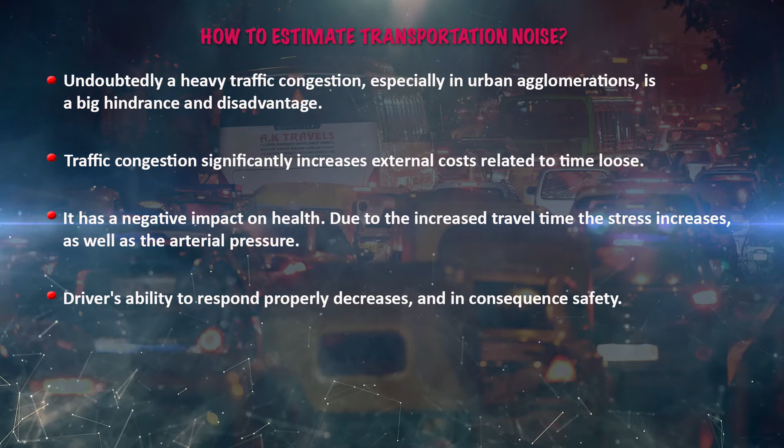Due to the increased travel time, stress increases and arterial pressure increases. The driver's ability to respond properly definitely decreases, and in consequence safety is affected. These are the factors involved in the transportation sector. Although these effects of congestion resulting from excessive traffic, poor traffic management and sometimes drivers' errors are difficult to measure, many efforts are made to improve traffic flow, especially in urban areas.

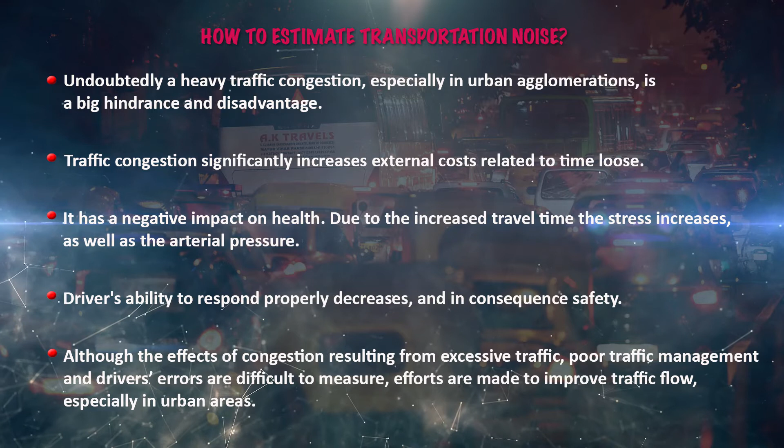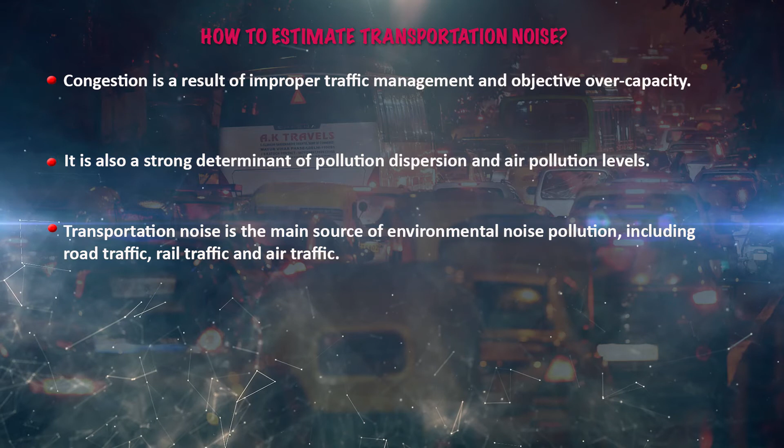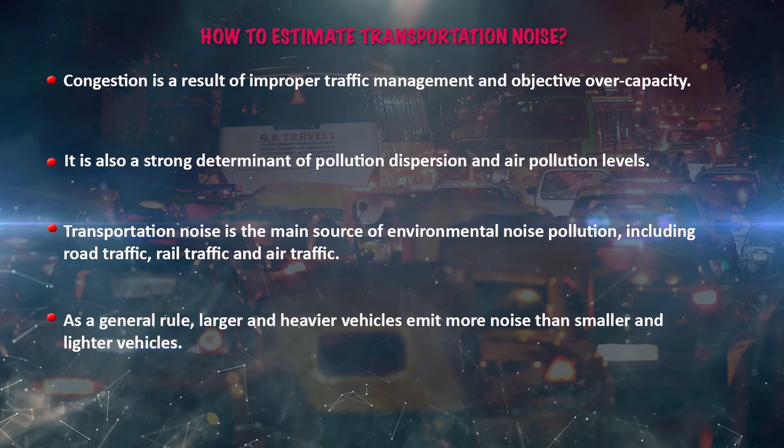Congestion is a result of improper traffic management and objective overcapacity. It is also a strong determinant of pollution dispersion and air pollution levels. Transportation noise is the main source of environmental noise pollution, like road traffic, railway traffic and air traffic. As a general rule, larger and heavier vehicles emit more noise than smaller and lighter vehicles, with some exceptions, like helicopters and 2 and 3 wheelers.

The noise of road vehicles is mainly generated from the engine and from frictional contact between the vehicle and the ground and air. In general, road contact noise exceeds engine noise at speeds higher than 60 km per hour. The physical principle responsible for generating noise from tire road contact is less well understood, that means it is not properly studied.

The sound pressure level from traffic can be predicted from the traffic flow rate, the speed of the vehicles, the proportion of heavy vehicles and the nature of the road surface. Special problems will arise in areas where traffic movements involve a change in engine speed and power, like traffic lights, hills, and intersecting roads, and sometimes where topography, meteorological conditions and low background levels are unfavorable, like mountain areas.

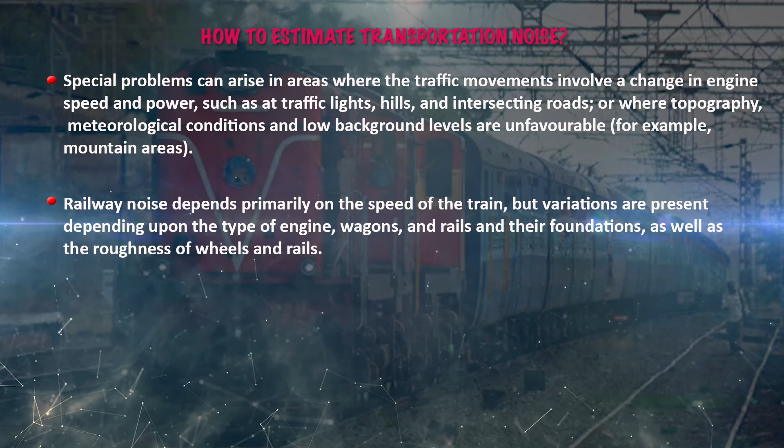Railway noise depends primarily on the speed of the train, but varies depending upon the type of engine, type of wagons, rails and their foundations, and the roughness of wheels and rails. Interestingly, small radius curves in the track, as may occur for urban trains, can lead to very high levels of high frequency sound, known as wheel squeal. Noise can be generated in stations because of running engines, whistles and loudspeakers, and in marshalling yards because of shunting operations.

The introduction of high speed trains has created special noise problems with sudden but not impulsive rises in noise. At speeds greater than 250 kilometers per hour, the proportion of high frequency sound energy increases, and the sound can be perceived as similar to that of overflying jet aircraft. Special problems can arise in areas close to tunnels, in valleys, or where ground conditions help generate vibrations. Long distance propagation of noise from high speed trains may constitute a problem in the future as environmentally friendly railway systems are expanded.

Aircraft operations generate substantial noise in the vicinity of both commercial and military airports. Aircraft takeoffs are known to produce intense noise and vibration, as well as rattle sound sometimes. Landing procedures also produce substantial noise in long, low altitude flight corridors.

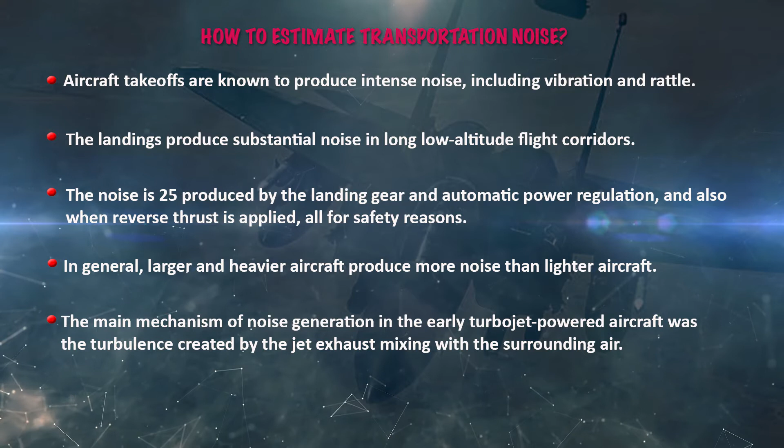So the main mechanism of noise generation in the early turbojet powered aircraft was the turbulence created by the jet exhaust mixing with the surrounding air. This noise source has been significantly reduced in modern high bypass ratio turbofan engines that surround the high velocity jet exhaust with lower velocity airflow generated by the fan.

So the fan itself can be a significant noise source, particularly during landing and taxiing operations. Multi-bladed turboprop engines can produce relatively high levels of tonal noise. The sound pressure level from aircraft is typically predicted from the number of aircraft, the type of airplanes, their flight paths, the proportions of takeoffs and landings, and the atmospheric conditions.

Severe noise problems may also sometimes arise at airports hosting many helicopters or smaller aircraft used for private business, flying, training, and sometimes leisure purposes. Special noise problems may also arise inside airplanes because of the vibration. The noise emission from future supersonic jets is of course unknown.

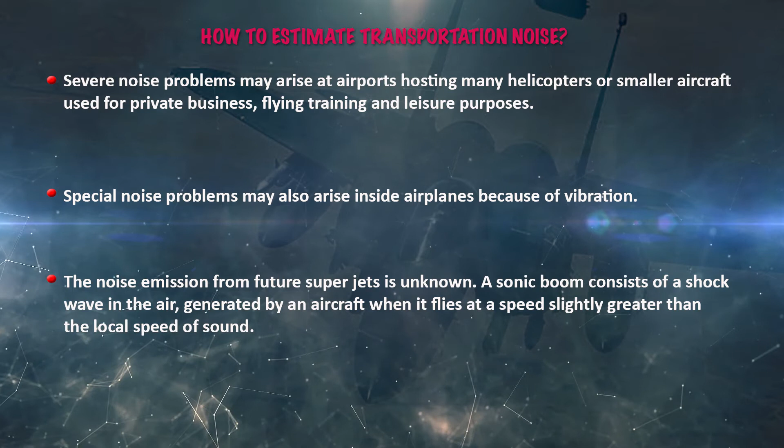A sonic boom consists of a shock wave in the air generated by an aircraft when it flies at a speed slightly greater than the local speed of sound. An aircraft in supersonic flight trails a sonic boom that can be heard up to 50 kilometers on either side of the ground track, depending upon the flight altitude and the size of the aircraft. A sonic boom can be heard as a loud double boom sound. At high intensity it can damage property.

Noise from military airfields may present particular problems compared to civil airports, for example when used for nighttime flying, for training interrupted landings and takeoffs, that means touch and go, or for low altitude flying. In certain instances, like wars or specific military activities, there will be other intense noise pollution from heavy vehicles like tankers, helicopters, and small and large firearms.

So there are 5 types of transportation noise estimation. The first one is internal combustion engine noise prediction. When the internal combustion engine is working, it generates a lot of noise in the surrounding environment. Noise can disturb people's daily life and even endanger people's health. The noise problem has become a growing concern of society. When people are exposed to noise for a long time, it can cause insomnia, cardiovascular diseases, and sometimes death.

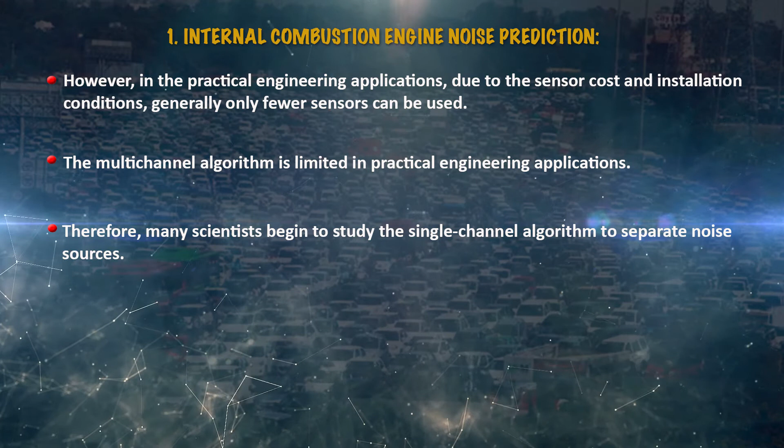The Global Legislative Committee is developing strict regulations to make ships, cars, and other transportation vehicles quieter. However, in practical engineering applications, due to sensor cost and installation conditions, generally only fewer sensors can be used. So the multi-channel algorithm is limited in practical engineering applications. Many scientists began to study the single channel algorithm to separate noise sources. For example, Du et al. used empirical mode decomposition, EMD, and independent component analysis methods to separate the combustion excitation signal and the piston slap signal.

Another mode is the ensemble empirical mode decomposition, EEMD, which is a noise assisted data analysis method that adaptively decomposes signals based on the local characteristics of signals. All complex signals are composed of multiple simple intrinsic mode functions, IMF, and each IMF is independent. EEMD makes noise cancel each other by continuously superimposing white Gaussian noises on the input signal.

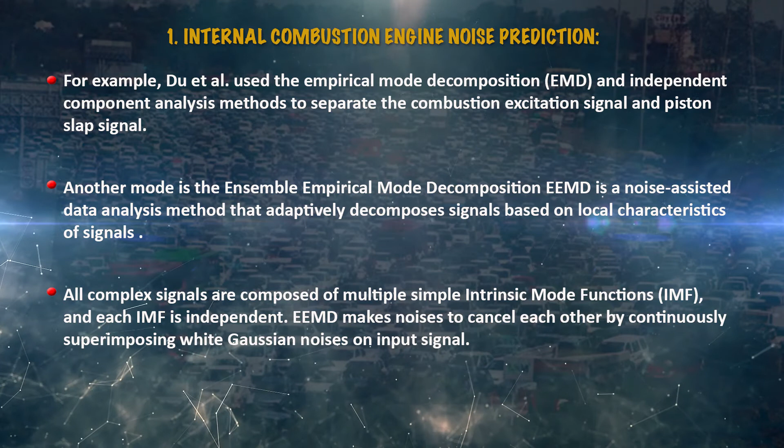In this way, this method can decompose different scales or trend components that really exist in data time series step by step and generate data sequences with the same characteristic scale size, and the additional noise is gradually eliminated one by one. The final result of denoising is the signal itself, because it is the only durable and stable part of the EEMD.

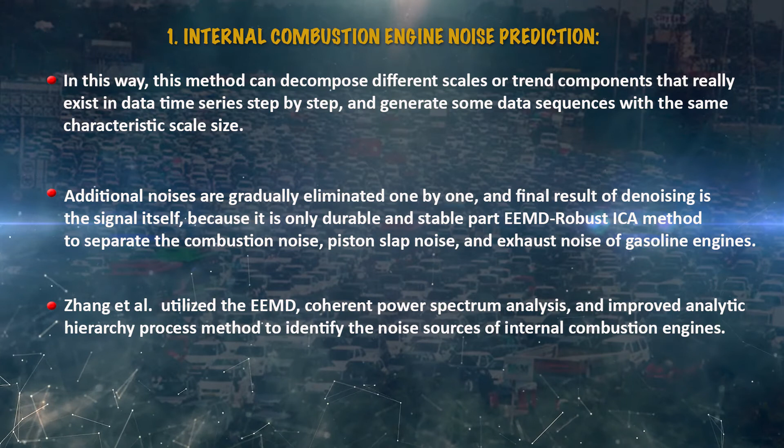The next one is the robust ICA method to separate the combustion noise, piston slap noise and exhaust noise of gasoline engines. They utilize EEMD, coherent power spectrum analysis and an improved analytic hierarchy process method to identify the noise sources of internal combustion engines. In some cases, EEMD and generalized transform methods are employed to separate the combustion noise, piston slap noise as well as gear noise.

The second method we have to look into is exhaust and intake noise prediction. Intake and exhaust noises are the most significant sources of exterior vehicle noise. The intake and exhaust noise sources are divided into primary noise sources, where we see pressure fluctuations in the manifolds and their propagation to the exhaust tailpipe or intake orifice, which is radiated as noise, caused by the primary noise source, the unsteady mass flow through the valves.

The system responsible for engine breathing or primary noise is similar, as it is suitably harnessed to improve the volumetric efficiency of the engine by wave action tuning. The secondary noise sources are the flow motion through the intake and exhaust systems. This self-induced noise we normally call flow noise.

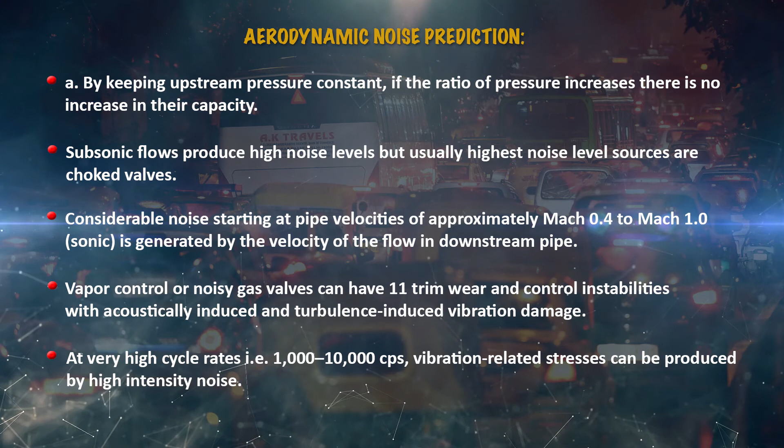So here we have to consider vapor controls also. That means vapor control, we can also say noisy gas valves, can have trim wear and control instabilities with acoustically induced and turbulence induced vibration damage. So at very high cycle rates, that is 1000 to 10,000 CPS, vibration related stress can be produced by the high intensity noise. Valve service life can be drastically reduced by the noise induced damage, and in some cases it may be responsible for valve or piping failures quickly, in minutes or hours.

And also we have to see brake noise prediction. So brake noise has been an issue of concern to vehicle manufacturers, because brake noise can be categorized into 4 basic categories. First one is brake squeal, that has a tonal character, with components above 1000 hertz, or it can exceed that limit.

And then brake moan, that occurs at moderate speed and is characterized by 100 hertz frequency components. And the third one is brake creep groan, characterized by frequency components of approximately 100 hertz, and it occurs at speeds less than walking pace. And the fourth one is brake judder. It is characterized by frequency components of about 10 hertz, at speeds less than walking pace.

So all these four categories of brake noises are because of the pairing of friction surfaces at the rotor disc and the pad. So the disc, the pads and also the caliper, these three assembly components radiate brake squeal noise. In the case of brake judder, moan and creep groan, the resonant frequencies of the brake components are usually so low, less than 1000 to 2000 hertz, you can imagine, so the vehicle suspensions act as a resonating system. So with all these specifications, we have to understand that there are many methods in practice for noise as well as vibration impact.